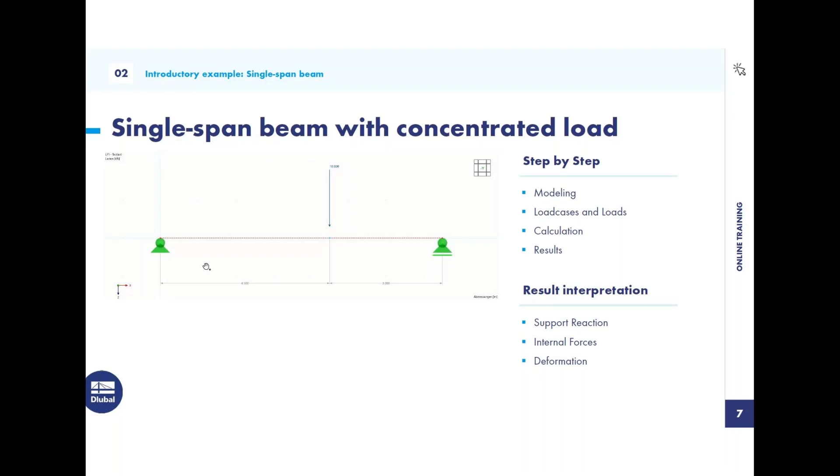Okay, so maybe then let's switch to RFEM. Yeah, okay, back to the user interface.

So for example, when we want to create nodes, that's the beginning of every modeling. Nodes are the beginning, and on these nodes you can put lines or members, and surfaces need these lines at the border.

So for example, with nodes, you can start here in the navigator data and click for a new node. I will show you. You can also use the menu, basic, nodes, or in the table you have an option with the coordinates to create nodes, or even here in the shortcut.

So you see you have different ways to model, but okay, then let's start. I will close this, and then let's start with a new model.

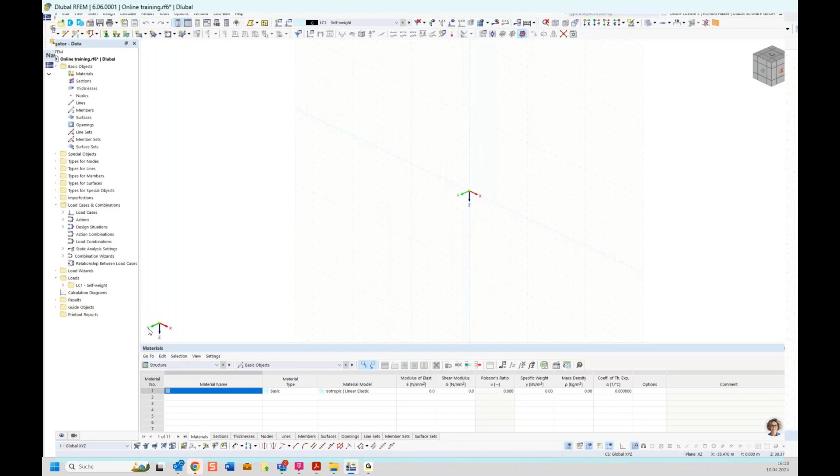It's connected to the global axis system. So you see the Y direction when I click on Y, or when I go to X. Same idea with views in X, Y, Z, or you can choose other directions. Another option is when you press Control and the middle mouse button, you can also turn around here.

Okay, but let's start with the modeling. Our system, I said we have a 7.50 meter long single span. So let's begin with the nodes. I choose the shortcut and click to the 0,0 coordinate with its left.

Now we have the first little problem. When I go here, we see 4 meters, and when I go here, 5 meters. So we want it in the middle. Now we have different options.

First, I can click on this node, and in this case it fits perfectly because we start at the 0,0 coordinate. Then I could change the X coordinate to 450 and say OK. Now you see it's at 450 how we want it.

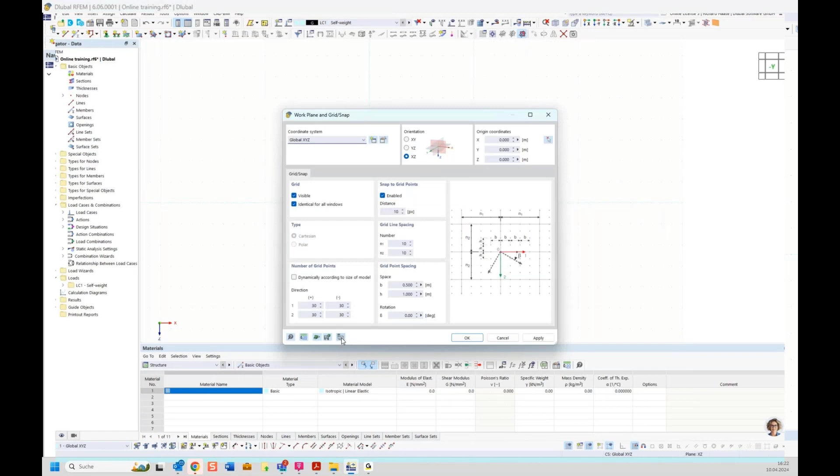Then we need the last point at coordinate 750. Let's do it this way. Maybe I'll set it to the default setting. You can also do it here. So now we have 3 nodes.

Maybe I showed this before: when you left click and go from left to right, you see orange color, and from right to left, you see blue. Maybe I'll continue first with a line. Let's go to the node, to this, and again to this.

When I go from left to right with this orange color, for example over this line on this node, you see only this node gets selected. But when I go from right to left, you see the line and the node are selected. So you have these both options.

The orange color only selects the object which is completely within this rectangle, and with blue you only need a little of the object and it's selected. So now we have 3 nodes and 2 lines. We can select these both lines, go with right click, lines, and edit.

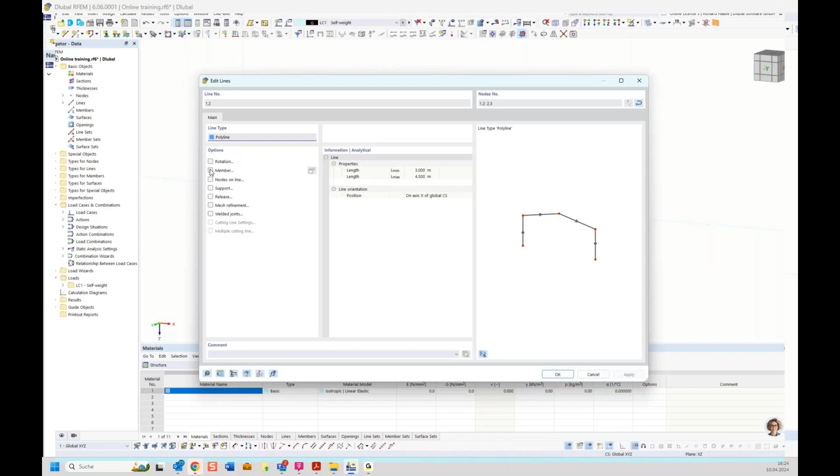So we have this line and want to transform this line or give it some properties, and we say we want to transform this line to members. Then a new menu opens, the new member menu. What can we see here? A member type.

The beam is, I'd say, the default type. The beam gives all forces to other objects. So for example when we go to tension, you can always orient yourself with these pictures. We see here all forces at beam, and for tension, you see only tension forces can transfer to other objects.

Same for compression, here it's only negative forces. But let's go to another member type: here is a definable stiffness. Maybe it's interesting for you in your study time. There you see we have a new tab here, definable stiffness, and we want to create a new stiffness type.

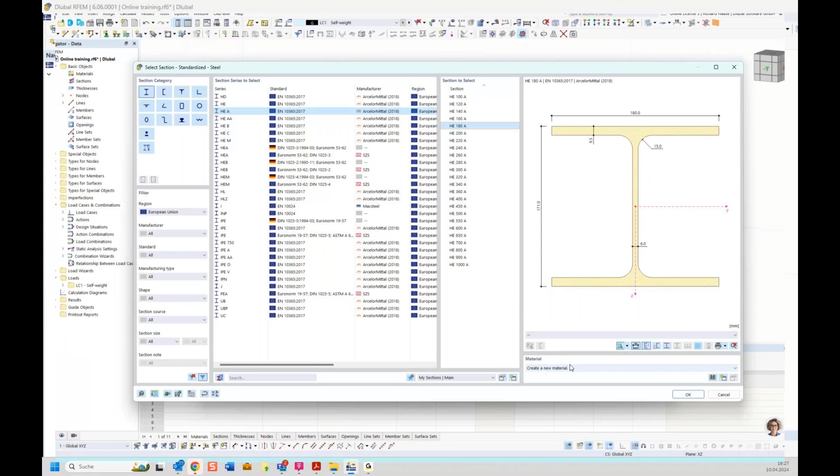When you create cross sections which are not tabled here, you can import them here. But let's take a standardized section, let's say such one, 180. Now you see this yellow color because we don't have a material created yet. So let's create one, there's again a library button.

Let's say European Union, material type steel. And then you see, oh my God, so much steel. How can I find my steel I'm searching for? You see here this searching function.

Let's take an S235, and the shown steel options are reduced. Here you can see, let's select such steel, say okay, and you see the yellow switch to blue. The blue stands in our program for steel, and we say okay.

Now we have an HEA 180 with the steel as S235. Say okay, and okay. Now we can see our property-less lines are transformed to such members.

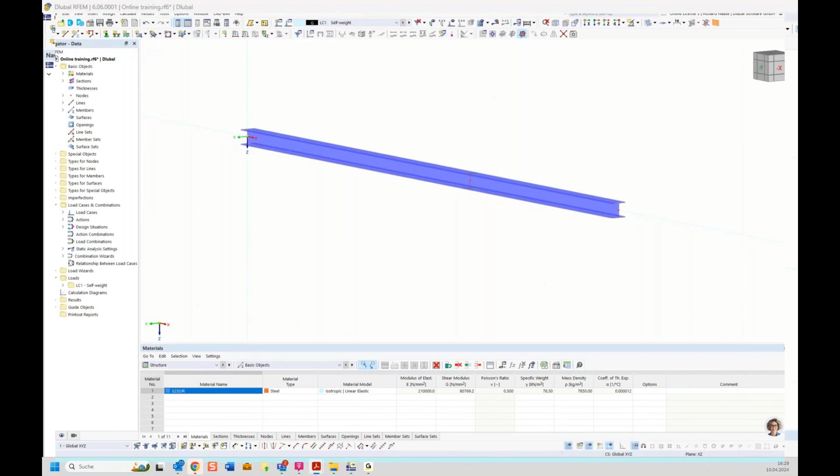So what we need are the supports we have here and the loads. But before modeling this, I will give our AI assistant the chance to calculate, and then we can compare the RFEM 6 results to the results of our AI assistant.

I copy from my document: a single beam with length of 7.50 meters with a single load at 4.50 meters of 10 kilonewton, and I want to know the bending moment at a length of 450. Then we start, and Mia will show us how good she is with her statistical knowledge.

So in parallel we can start modeling the nodal supports. There, when we go to this button, you see the degrees of freedom, the translational and the rotational.

We say okay, X direction and Z direction fixed. We want that on the left side. Say okay. And you see, when you click with the right mouse on this button, you can increase the size.

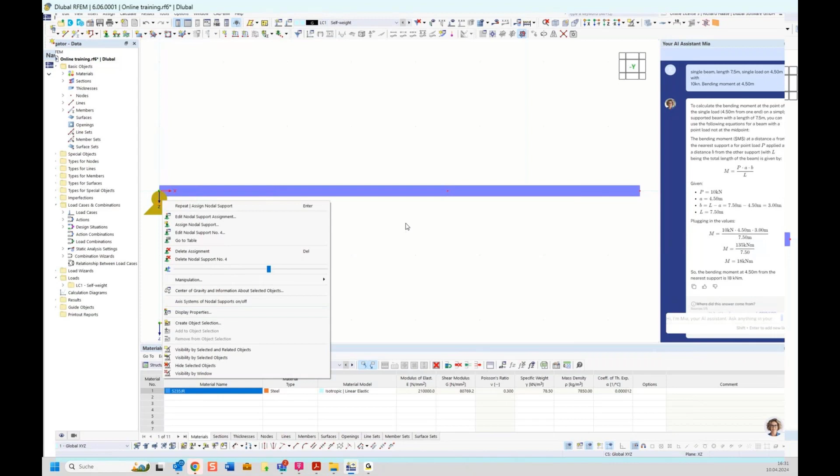And we need another one. We need here a nodal support with roller properties, and we say take our point. Okay.

What is missing? Maybe to control the length again, you can click here for dimensions. Didn't I click on my first node? Oh, that was wrong, sorry.

Let's select on this node, and this node. Then we must see the plane, and we must choose here the second plane. That's fine. We see our length is 4.50 meters. We have our control, our 7.50 meter long single span.

Now we need our nodal load. We go to loads, nodal loads. But you already can do it here in the shortcut, new nodal load, or even through loads, nodal loads. So everywhere, also in the table, you have the option to model in different ways. Let's do it this way: a new nodal load on our load case self-weight.

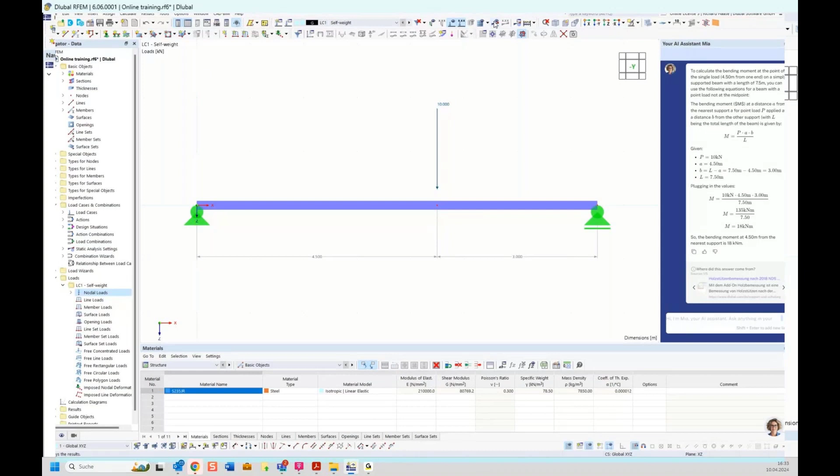On this button, you can start the calculation. For this load case, you also have the option here to calculate all, or when you have more than one load case or a lot of load combinations and other things, you can see here you can select what the program should calculate.

Global deformations, you see here the navigator results is new because we have calculated and have some results here. But we want to go to members, internal force, and to the bending moment My. Mia says we get 18 kilonewton meter, and our program said 20.4. So who's right?

I say Mia is right, but what's the reason for this difference? Maybe let's check the support reactions. So we have 10 kilonewton from the top side, and see here 5.3, 7.3. Okay, it's higher than 10. So something must be wrong, or not wrong, but how can I say.

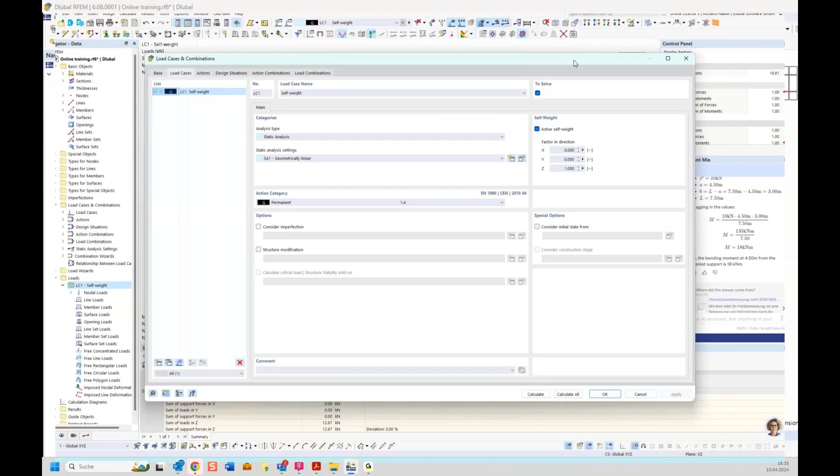We must investigate, and the reason is the load case self-weight. When we go to edit, here we have an active self-weight in that direction. So we have created our steel section, and this steel section gives its own self-weight on the structure. The default setting is that it's activated, but I'll show you how you can deactivate it.

We go to the navigator and here to the display. Then we have here the loads and the self-weight. And you see here the 0.356 is the self-weight of this HEA 180 profile. And that's the reason why the results are not as expected.

So let's deactivate here the active self-weight and calculate our self-weight load case again with our nodal load.

Now you see here our 18 kilonewton meter, exactly what Mia said.

Maybe Mia can assist you with statics questions, or even if you have questions about the program, you can write it here and Mia will give you answers.

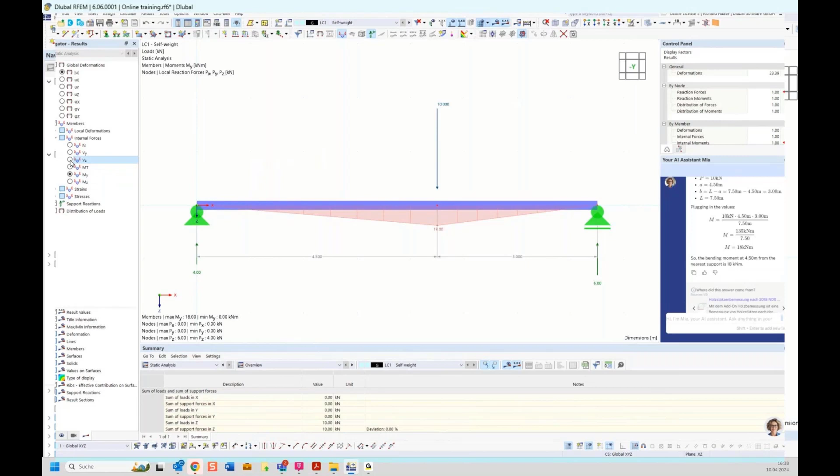Good, then we have this - the internal forces. On one side we see here the moment, but we also can see here the shear forces, the deformations, and the options for stress strains. You have a lot of options of the results to see them.

That's enough for my first example. Let's go to the next one: a two-span beam with alternating load positions. We will create more than one load case.

We will do three. Then I will show you the combination wizard from RFEM 6, when you have different action types like self-weight and snow, wind, and so on, and how we combine it with the gamma and psi factors.

Okay, and another thing, but let's start with the modeling of our second example. Okay Mia, thanks. Then I will delete my model.

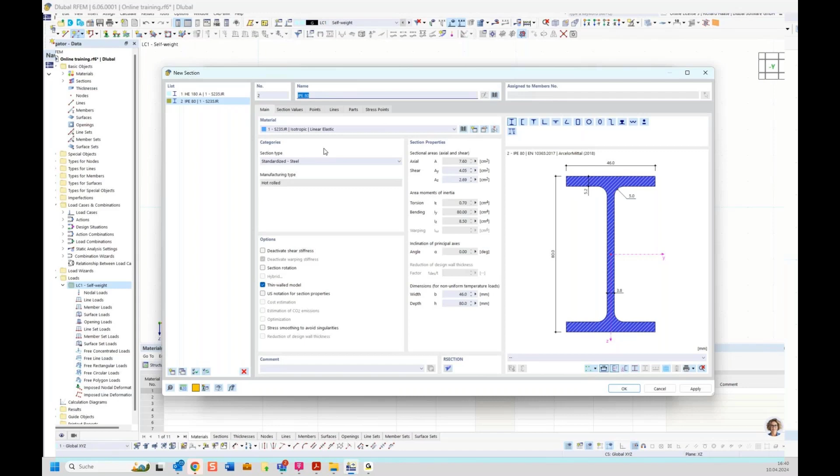We have a HEB 300, and now you see the fitting standard. Let's take this with the Euro norm, and we say OK.

From 0, we want to go to 10 meters. You see, it's a faster way than selecting the nodes and then the lines and transforming the lines. I wanted to show you the principle of RFEM 6, because behind this member are always nodes and lines, but this is the much faster way.

Now we have a single span, but we want a two-span beam. So we click with the right mouse on this member, divide member by distance, and now you have the option between percent and meter. 50%, 5 meters, that's exactly what we want. So we divide our member and now have two 5-meter beams.

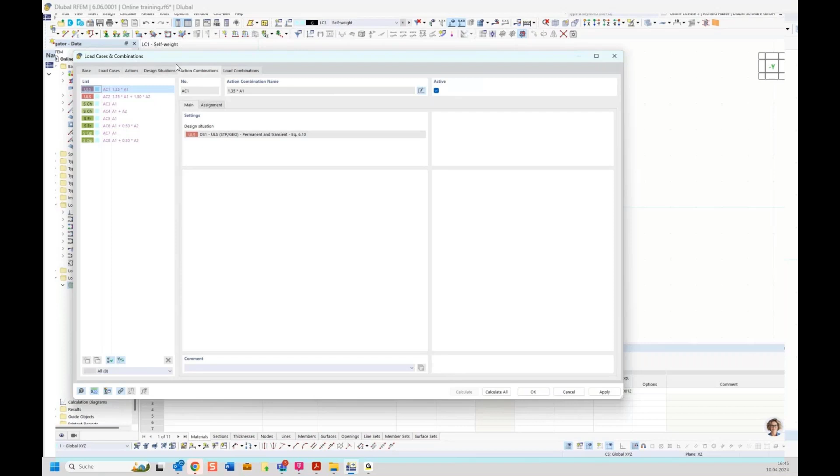Let's have a look at our ULS. Here you see Eurocode information, the combination rules with the gamma and psi factors. Now we see it combines the actions, the A1 and A2 of our self-weight and the other action, and here the load combinations.

Maybe here it's not so interesting, but I have another example where we have more than these two load cases. You can see here how it combines all load combinations after this rule.

Okay, now for our load case 1, we want to create a new member load. Right click, and have 2.5 on both members. You see, okay, he created it.

And for the left, the same new member load. On the left field, we want 5 kilonewton per meter, say on the left field. And now I could press the OK button, then close the load option here.

But I want to continue with my right field. So when I click here, apply and next, then I can easily switch to another load case. And okay, the same with 5 on the right field, and say okay. Now we are ready with our loads, and I close this with okay.

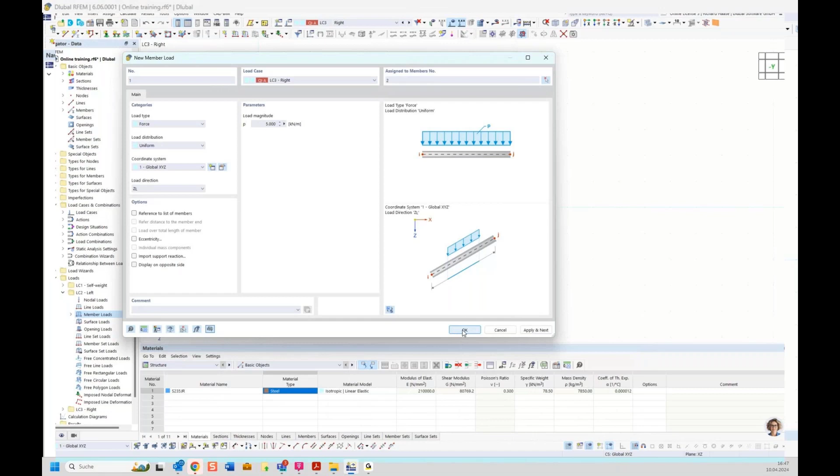Okay, and we can control it. We have the self-weight plus the self-weight of the HEB section, but I have deactivated it, though you can activate it again. Then our left field load, and on the right.

Maybe when you make controls with examples from literature, it could be possible that you get other results than in RFEM 6. The reason I show you, you can see it in the sections. You see here this option, deactivate shear stiffness. So the default setting is that RFEM 6 calculates with the axial and the shear stiffnesses, but in literature examples, most of the time they don't calculate with this kind of stiffness. So you can click it here, deactivate it, and make the shear stiffness infinity.

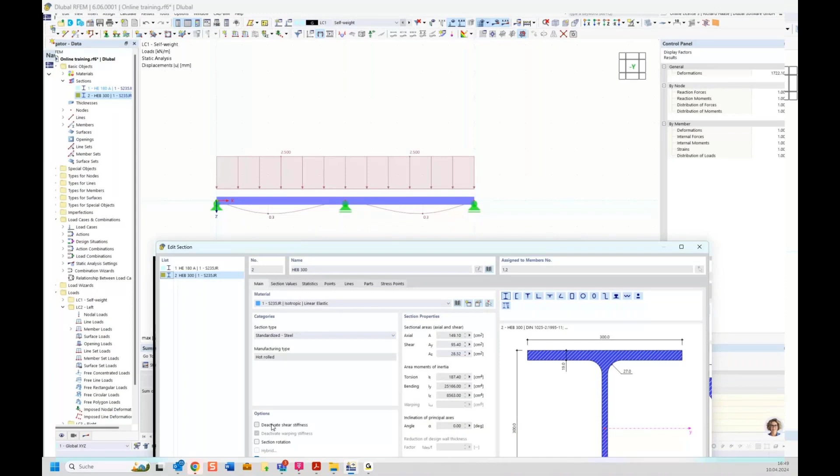Okay, so when we see the deformations, we have 0.3 millimeter here. And when I deactivate the shear stiffness, making it infinity, let's see - we have 0.3. Say OK. We get only 0.2. So the system gets more stiffness because the shear stiffness is now infinity.

So that's something you must know if you calculate with literature examples. Then deactivate it here, but I'll leave it active for our example. Okay, good. Then let's calculate all.

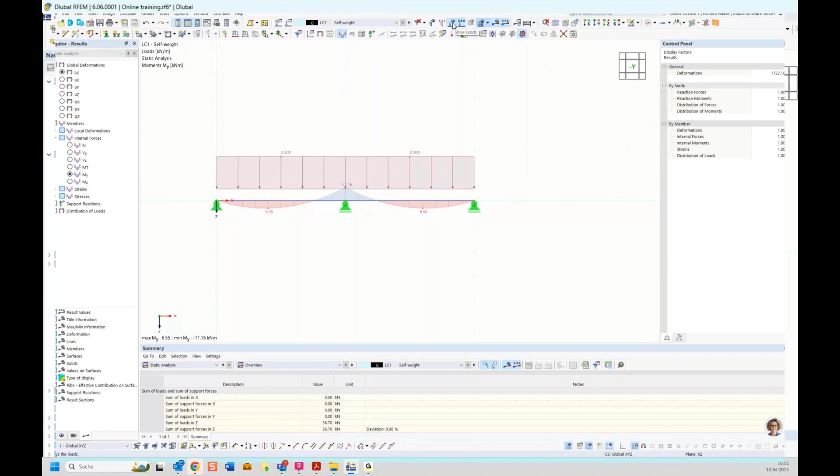And then I'll show you the results and explain something. Maybe we can choose the wireframe model here, it's then better visible. Let's see the bending moments. We can also deactivate our self-weights, our showing loads.

Okay, and we switch to our design situation. And now we see we have max and min values here. And why do we get this in this design situation? The reason is I'll show you how he creates this after the combination rules. Here for the ULS, you see he has 4 combinations in this case, and out of these 4, on every location, he shows you the min and max values.

Okay, so now we want to know where this result comes from. So this minus 37 - which combination gives us this result? Therefore you go here to static analysis, results by member, go to internal forces, and now we're at member 1.

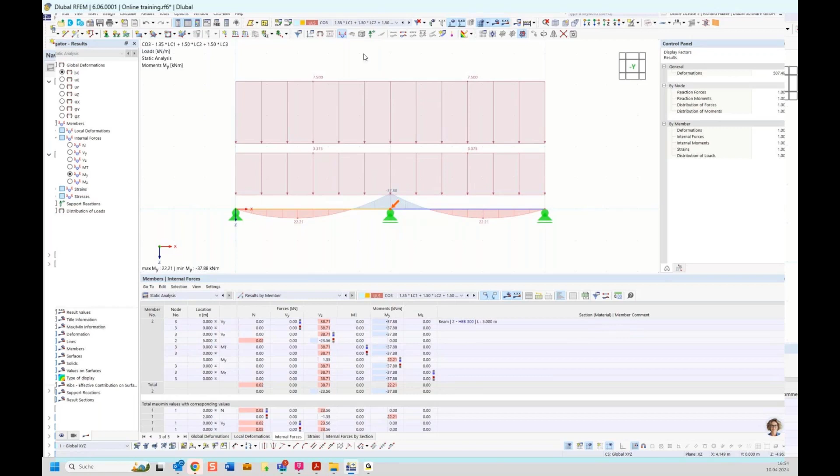Okay, then let's check it for the field bending moment. So this 26.78 - you say, okay, it comes from combination number 2. And combination number 2, you see here our self-weight with load case number 2, and load case number 2 was the load on the left field.

The same you can do for the support reactions. So maybe deactivate the member results, and let's see our support reactions. Now we want to know where this 77 kilonewton comes from. Same principle - results by member, you must switch to results by node, because this is a support node. Results by node, switch here to support forces.

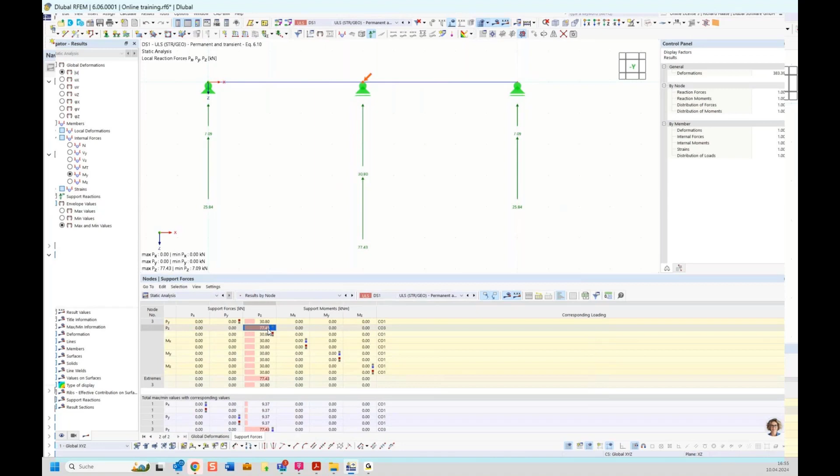And now, okay, see here, that's number 1, and we want to go to number 3. And you can see here number 3, and here we have the 77, which also comes from combination number 3. Combination number 3 was, as you see here, self-weight, left and right field load cases. So that fits well. Yeah, that was the second example.

Then let's switch to the PowerPoint presentation.

The next example is a Gerber beam or hinged beam. This system is maybe the same as our 2-span beam, only here there's a hinge, and through the hinge this 2-span beam becomes statically determined. So it's a coupled system of a single span to a single span with a cantilever.

Now, how do we want to create such a Gerber beam? In Germany, we have a book with a lot of tables and formulas, and we see here a Gerber beam with 2 times the same length, and a formula for the location of the hinge.

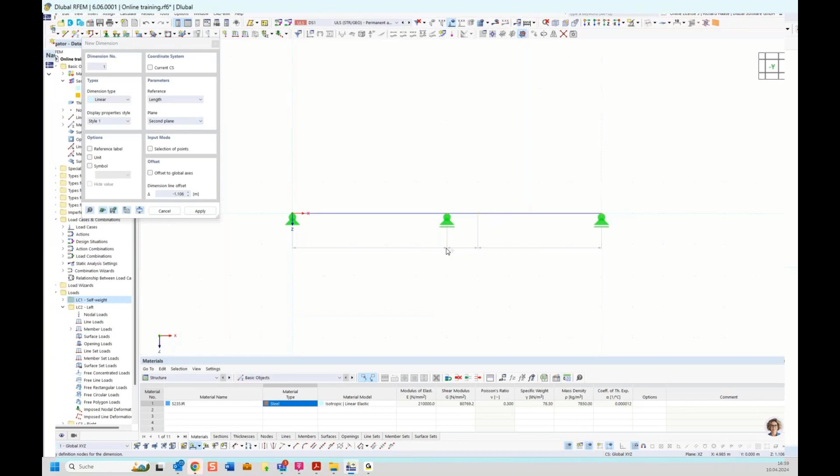Another point for this Gerber beam is that the maximum field bending moment is exactly the same as the moment over the support. And it's for the design check more easy when you have one size to choose for the section.

Okay. Oh sorry, I opened the German one. I'll switch back to English, sorry. One little moment, please. Okay, now it's open. I think you didn't save it. Okay, then let's close and make new.

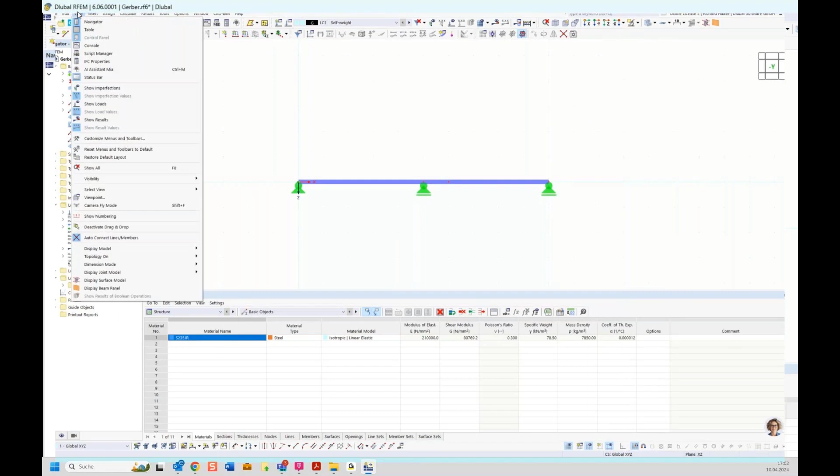And our nodal supports. And say here our roller, this one. Okay, a little bigger. Okay. So first, wait, okay, I will customize. Oh, wrong. Restore and set toolbars to default.

Okay, so now I show you how you parameterize your model. The command is here under Edit Global Parameters, so it's a little bit hidden. As I mentioned at the beginning, we have a search function here, so you can type global parameters and find it there.

Or, when working more often with this command, you can customize your toolbar. You go to View, Customize, Menus and Toolbars, and go here for global parameters. Every command you can find here or over this searching function. I want to add Global Parameters to my toolbar, so left click, hold, and add it here, and now we have it fast to find.

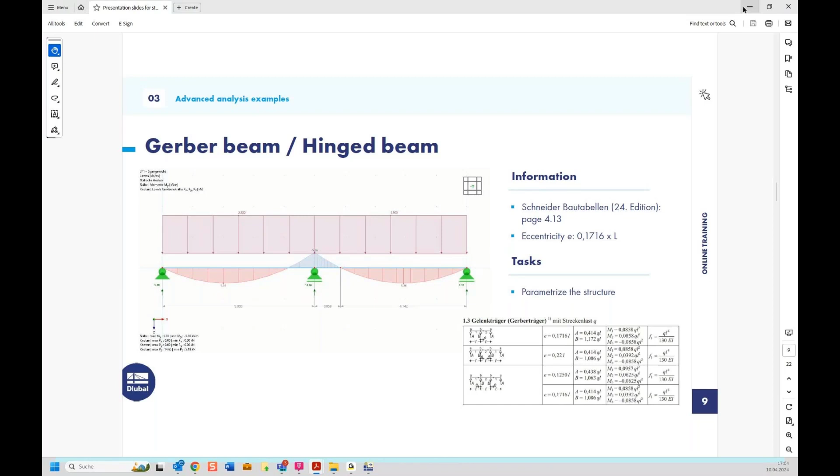And because of this formula, we can add this formula too. We can switch between value and formula. Let's choose formula here, and you see now our formula field here is available. So it's important, when you choose such formulas, you must use a dot instead of a comma, otherwise Rfem 6 gets problems to understand. So from our table book, it was 0.1716.

The field length, but this is only, it would be here, but we want to have our Gerber hinge here, so we must say another field length. And now we see, okay, it's at 5 meter 858. Now, we have our global parameters, and now we must connect our model with these parameters.

So we go to, oh wait, before I forget, our dimensions. Okay, so good, maybe I save it - it's a good thing all the time.

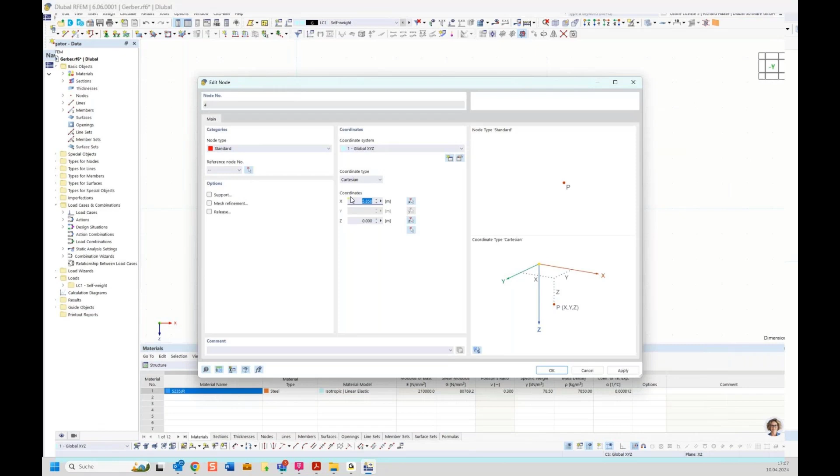Say again, global parameter. We want to have our Gerber, and you see our 5 meter field again with the yellow symbol. Okay, and you see before it was on 1 meter, and you see it switched the length.

The last thing which is missing is our hinge. So let's go to the member, same principle. We want a hinge. Important here, you see this direction: this is the start, and this is the end of the member. So we need a hinge at the start point. We click hinge, get a new tab, and we want a member hinge at the start, a rotational hinge, is that what we want? Say okay, and here we see our hinge. It's always the biggest size, but you can decrease or increase the size here.

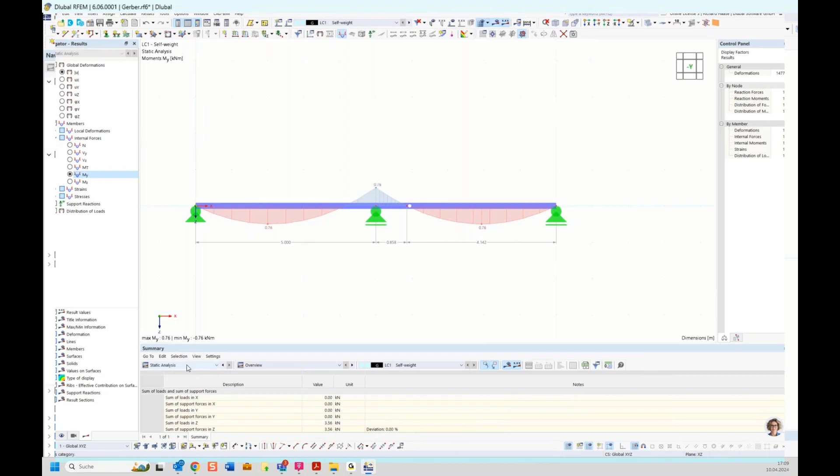So then let's view the self-weight load case to see if it functions. And global deformation we don't want to see. We want to see members, internal forces, and bending moment My. We see here the same results in a field and over the support. Now we want to check if the parameterization functions.

So when I say okay, I don't want 5, I want 7 meter field length. It's a little bit big, so say okay. You see 7 meter and 7 meter, and the hinge also moves. So then let's prove it. Yeah, and you see, okay, a little difference, but 1.50, so we can say it's right. And yeah, so you have now a parameterized Gerber system.

This parameterization you can use for all models you can imagine. And if you have such systems more than one time, that's really good and saves a lot of time. Okay, that was this example. And now, at this time we only used the member type.

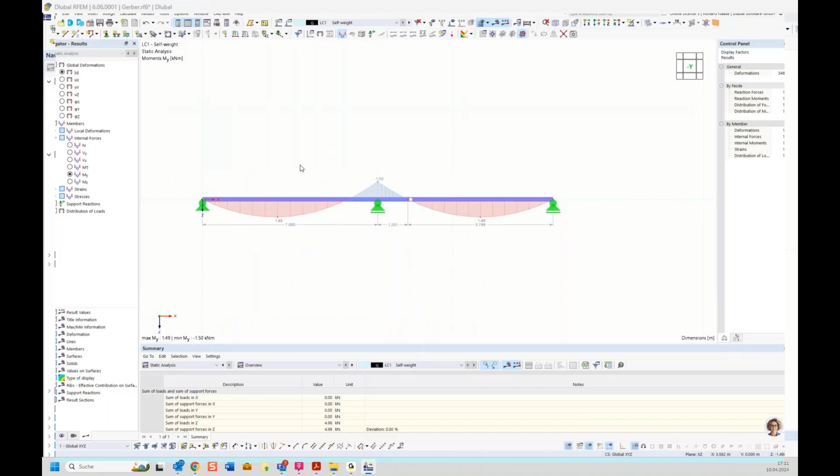Now I want to show you a frame with a tension member and show you the effect of such member types, and also the combination. You see here we want to model snow, wind, and temperature. Okay, then we can delete it here. Oh wait, sorry.

Okay, then let's create our frame. So we have again our HEB 300. Say okay. And 5 meter in the height, and 5 meter, 1, 2, 3.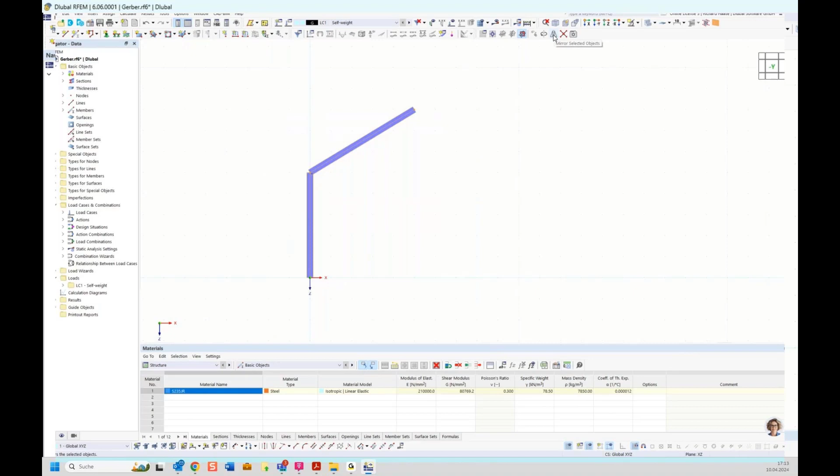And now, okay, our frame is symmetric. So you have the option to draw two other beams, but I will show you an option. Here it's fast, but when you have a big hall and it's all symmetric, you only need to model one half, and the other you can make here. You can mirror the objects, and now I will show you how it functions.

So you select your objects and say mirror selected objects, and you want to create a copy and choose the plane, as mirror plane the YZ. So you must change it here to YZ and change a point. Say here this top point, and say okay, and now you see you mirrored your system. For bigger systems, or symmetric and big systems, it saves a lot of time, and it's a very nice function.

Okay, then let's add our nodal supports here and here. And for the end, our tension beam, let's go again here, new single member and node beam.

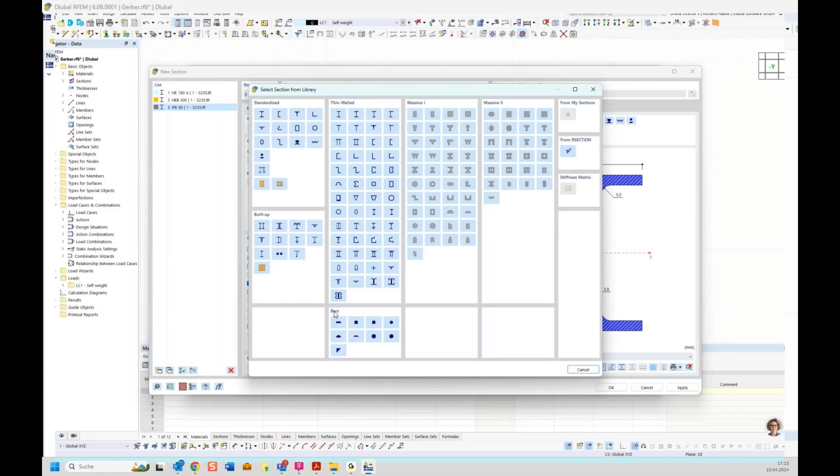Now we want our tension member only positive forces. Okay, and select him here. Oh, it's the wrong section type, but let's change it fast. We go to the library and want a bar type, a round bar with 30 millimeter. Say okay. It looks better, good.

Then I want to show you first the loads. Let's make a new load case. We have here snow we want to have, and another wind, and you must choose a fitting action category, and another one temperature, with action category temperature.

Okay, so now we go to actions. You see, now we have here on these symbols also the fitting action category, and now it's interesting, and also saves a lot of time, this automatic load combinations with the combination wizard. Okay, that's only the self weight, but look here, we have self weight, snow, and wind with a leading action category, and the non-leading get the psi factors.

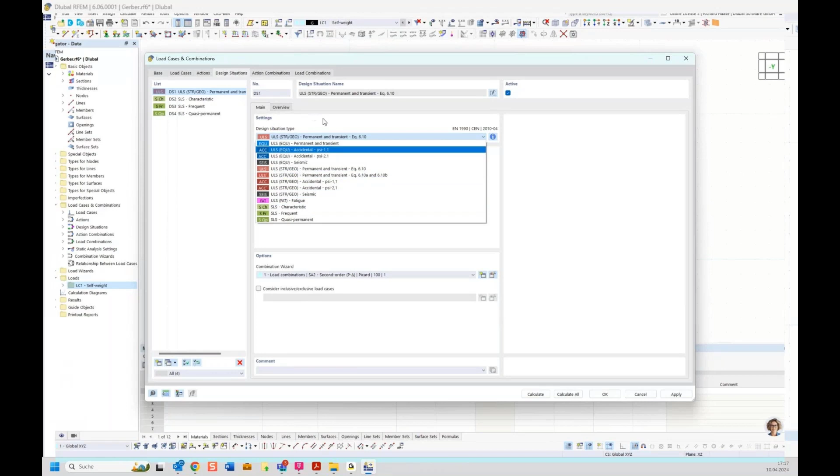So here, and this is very, very good. And you have more for fatigue or for seismic, so different rules, and with the help of the wizard you don't need to make it manual. It's fast, and you're on the safe side, and have all combinations, all possible combinations.

Okay, then let's say okay. I think it's really the problem of the new GoToWebinar. Sorry for that. That's not the standard faults.

I will start RFEM new.

Okay, restore. I hope he saved it. Then let's fix modeling it again. Wait, maybe I have it here. Gerber, maybe. Okay, then I have some right materials. So we had here our 5 meters. Okay.

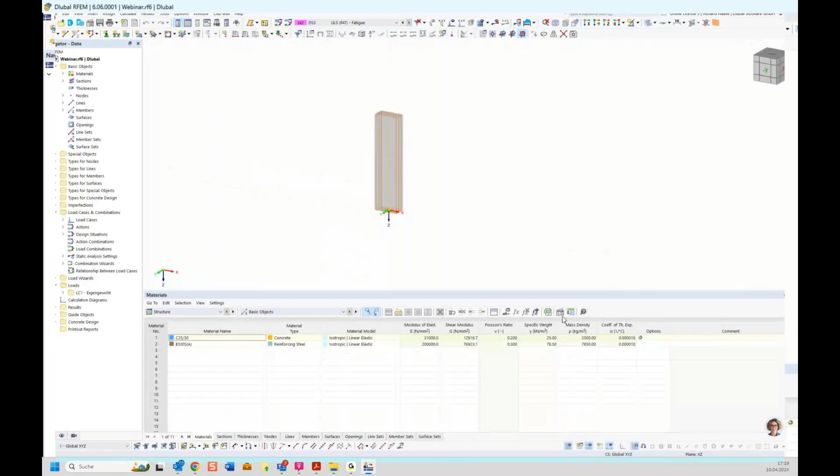I started new, must depend on this new GoToWebinar. Normally it don't crash. Cannot be moved. Okay. Then I will try it again, and it's away again. Okay, one more time.

Otherwise, we can maybe go into the coffee break, and I can try to either model it afterwards, or we leave this example. Oh, okay, maybe that's a better idea. Yeah, okay, maybe my PC has some problems with the new GoToWebinar. Then let's do it this way. Let's go into the coffee break.

Jonas, what do you say? Maybe 10 minutes? Let's make a coffee break until 5:30, and then in 10 minutes we meet again and go further and explore some new realms in Rfem. Okay, all right, yeah. Okay, then have a good break. See you guys.

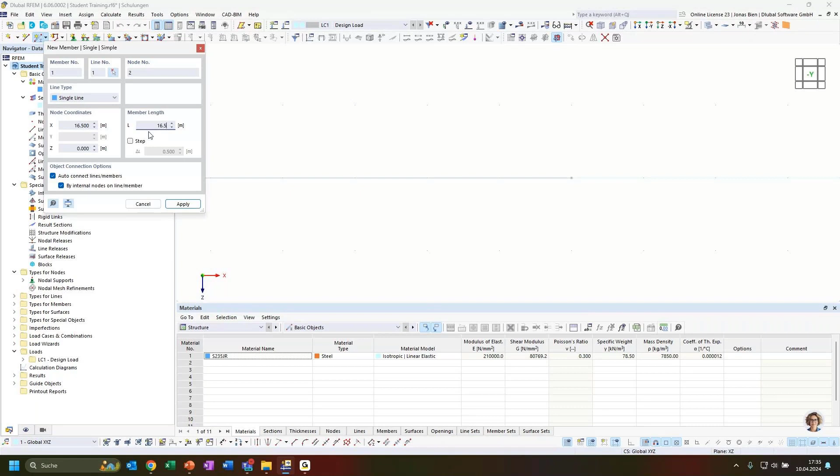All right, so first of all we model the single span beam. We create a new member with a member type beam. The section would be HEB 300. Click OK. The length should be 16 meter 50. So I don't have a point to grab here, so it's actually hard to find the correct length. Therefore I would just use this input dialog to set the length to exactly 16 meter 50.

The important part, if you use that, is that you don't go back into the graphical user interface. If I type something here and then go back to the main window of Rfem, it will directly overwrite my input value. So I need to make sure that when I input this value, I hit enter or apply before I leave this window with my mouse cursor. Alternatively, one other solution would be to adjust the grid or manually change the coordinate of the second node. There are multiple ways to define this beam of this exact length.

Then we had two additional nodes on this member where we want to connect the vertical truss members. So I divide this member by two intermediate nodes, and I set the option to create nodes on member, because I don't have to divide this member this way.

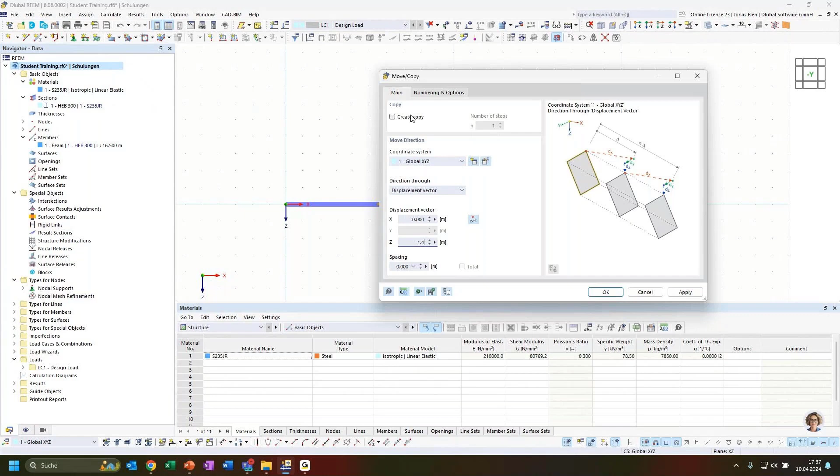So in order to achieve this position of the truss end nodes, I can use my copy function. I think the best option would be to take the nodes on member, the intermediate nodes, select them, go to the copy function, and copy these nodes in Z direction by -1.4 meters, making sure I want to create a copy. Because these nodes were originally nodes on member, when I copy them away from this object, they are directly transferred into node of the type standard. Now I could define my truss members between the two nodes.

What I could also do, I want to show you an alternative option. Here it doesn't make so much sense, but in larger structures, that's a very nice feature you can leverage to speed up a modeling process.

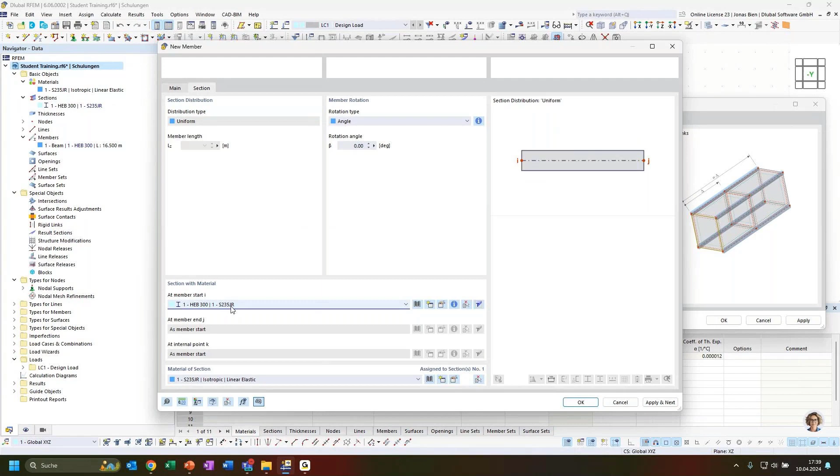I could either give a template member from my structure, or define a new template, and that I want to do because this definition of this member should differ from the first beam I defined. So I want now to have a truss member, and the section shouldn't be HEB 300, but an IPE 200 beam. I create a new section via the quick search up here, and create a new section number 2 of the type IPE 200.

One thing to add - Richard already told you that on the right side here you see which degrees of freedom these member types have, and there's a very nice indication of what internal forces are transferred at the end nodes. If you are unsure, I want to add that you can always use our online help manual.

In all of the dialogues you find this little box in the lower left corner, which you can click, and it will open our online manual - not only the correct manual for the program you are using, but also the correct section with respect to where you are opening it from. So I would directly come to the edit member dialog, and I could quickly browse through the different member types and get additional information. That's a very nice way to get first help.

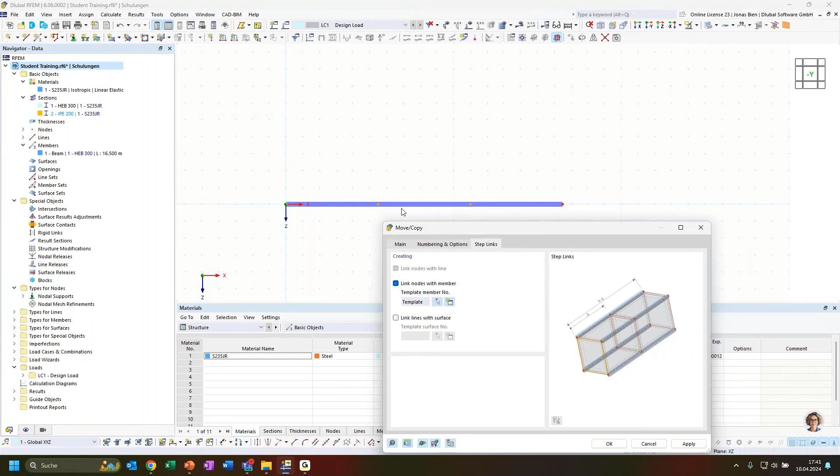All right, so the truss member is like a beam that has moment releases at its ends, and I will use this member type for the secondary support structure. Now I have finished the definition of the beams that I want to create with this move copy command, and I click OK. Now you can see with the copy command for these nodes, I have directly two additional members, and I don't need to do anything with this. That's already quite nice.

Then in the second step, I would take the outer nodes at the beam start and beam end and copy them minus 2.3 meters in that direction.

I could also, like if I have the dimensions here in this PowerPoint presentation, 1 meter 40 plus 0.9 meters - of course I can calculate this in my head, but if I don't want to, or if the numbers are not that even or easy to sum, I can type the mathematical operation in this input dialog, and it will calculate the correct value for me.

What is also nice, I can enter values with units. So if I type in 2,300 millimeters, it will automatically convert it to the unit that I use for this particular input. So this is very smart.

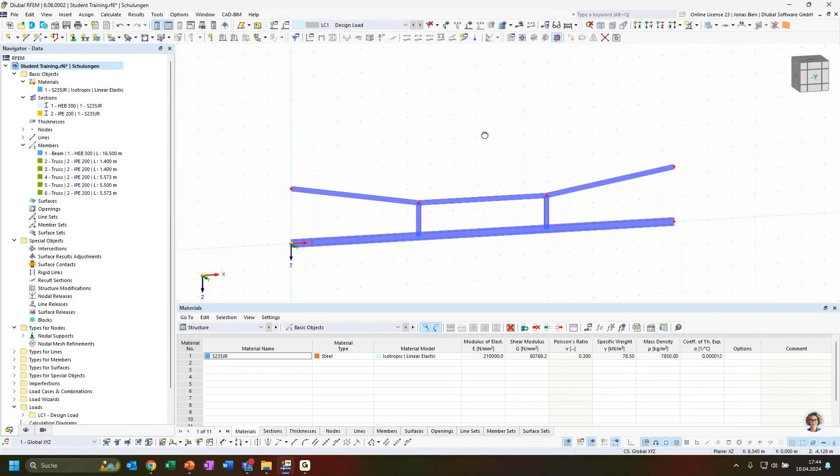So now I have defined all the members, and I can already see that they have different cross sections when I activate the rendered view. Up here you can toggle between different display modes for members - a transparent rendered mode, the wireframe model, and the solid rendered mode.

But sometimes it's hard to see if there really are different sections - they could have the same height but different section dimensions or whatever. In that context, I want to show you another function that allows you to easily distinguish between different sections or beam types. You can go to the Display Navigator tab, the second in our navigator.

Under colors of rendered objects, you can color the beams, the members, by their properties - for example, by member type. If I activate that, I see that this lower member is now colored in blue, which stands for beam member type, and the rest of the structure is colored in green, which stands for truss member type.

And I can also do that for section, for example, to highlight that I have different sections in my model. On the right side in the control panel, I automatically get the corresponding legend to the current setting. So this is quite nice to get a better overview of the elements and objects that you have defined in your model.

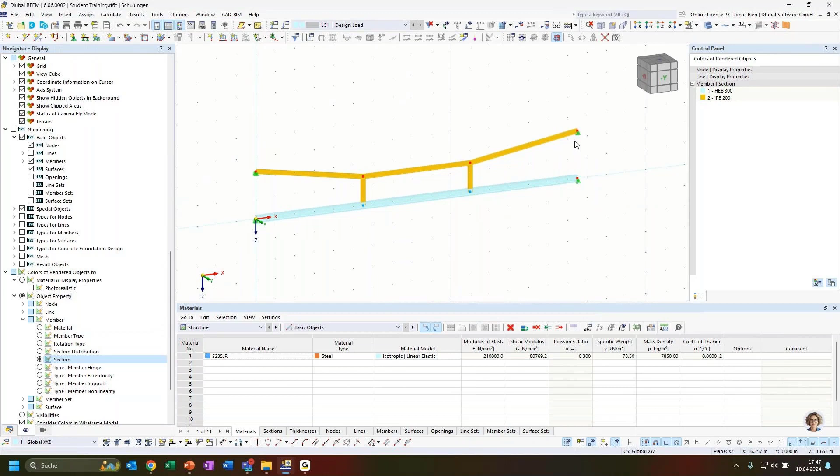If I would apply the same boundary conditions to the upper support structure, it wouldn't make a lot of sense, because here I need this horizontal restraint to actually make the upper structure stiff.

I can imagine that when I now, in the last step, load my lower member, this beam member, with a vertical load of 15 kilonewton per meter. I just do that right now.

Then the secondary truss member structure above it acts like some or provides some elastic supports at the thirds of the member of the single span member, and of course the stiffness of the support depends on the stiffness of the nodal supports here at the ends, also on the truss member stiffnesses and the length and so on.

And if these wouldn't be fixed in the X direction, they would just move towards each other, and I wouldn't have any additional supports provided by this upper substructure here.

All right, so now everything is set for the analysis. I've defined my members, I've defined the load, I've defined the supports. So I can now run the simulation. I do that by asking for the results, but of course I don't have any results yet, so it automatically calculates.

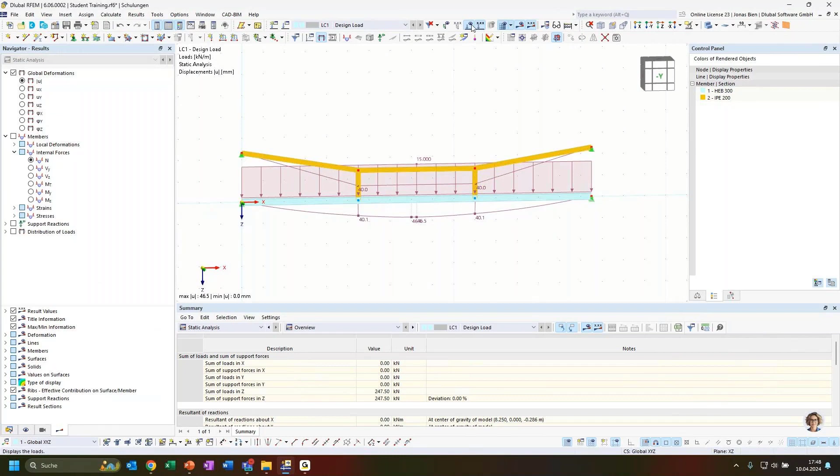And then I can access the results navigator and first look into my global deformations. I will switch off the loads just to make it a bit more informative or easy to see those deformations. And then I could also switch the display of these deformations, for example.

I mostly like to analyze member deformations by using this option to show the sections colored, because in this way I not only get the deformation of this wireframe model, but I can directly see the intensity of the deformation by the plotted color. Moreover, I could already see if there would be some torsion in the members by the display of this cross section. I could directly see this, whereas in the wireframe model, I can only see the overall deformation at a certain point along the member.

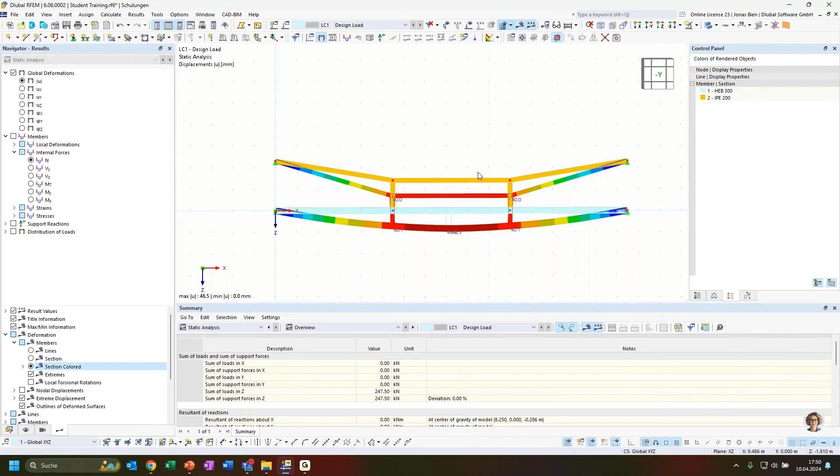So that's also useful. And what I see now is that I have around 45 millimeter maximum displacement at a midsection of the single span beam down here. And of course, the upper support structure is also deforming with it, elongating in these truss members, because all of them should be under tension.

We can check that if we proceed and go to the internal forces in our system to better read the forces. I go to the wireframe model and deactivate the rendering, and now I can see that I have very large tensile forces in this above supporting structure, and a vertical normal load of 40 kilonewtons in these vertical members, and these would be the support forces for the intermediate supports of this single span beam.

The beam itself is free of axial forces, because I released the horizontal support condition at the member end, but the single span beam below has vertical shear forces and also bending moments around the strong axis. And I can see by this jump in the shear forces that part of the shear forces are transferred to the upper substructure. But the exact values I couldn't read from this diagram because I only get the extreme values and the values at the end of each member.

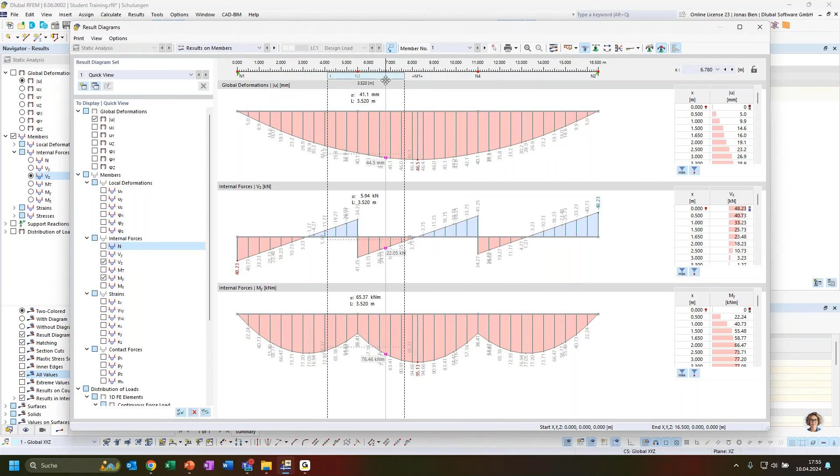Moreover, I have the possibility to average some results. I can just double click up here in this x-axis bar, and then I can create an averaging region, and it automatically calculates the average result value in this particular region. I can interactively move it over the length of my member to get the mean or average value within this window. This can also be helpful in some cases, like if you want average support reactions or something like this.

This also works for multiple beams. So if I select the 3 upper truss members here and open the result diagram option, it shows me the results for all these 3 members. It indicates on top here that the first section represents member number 4 from node 7 to node 5, then member number 5 from node 5 to node 6, and member number 6 finally. So that's also quite nice.

All right, that's what I wanted to show you in the context of this particular example.

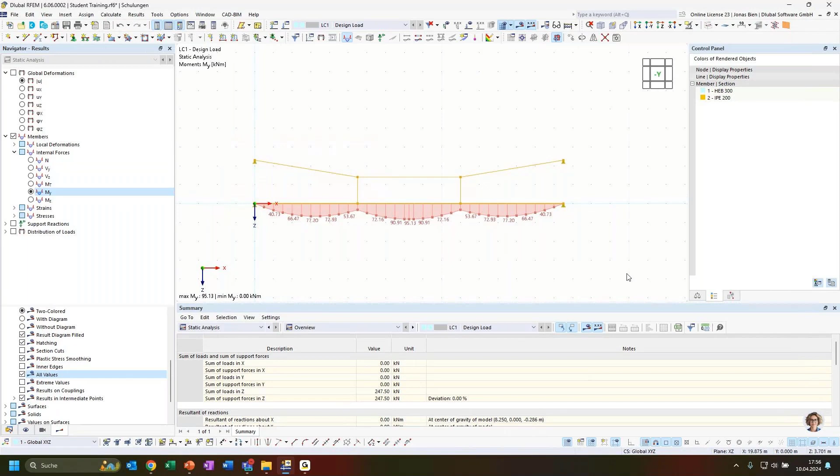If there are no open questions, I would proceed with the next one. I'll delete the complete structure and show what task is next on the list.

So the next exercise is to investigate a truss structure, and it says it should be an ideal truss structure. What does this actually mean?

It means that we have only axial forces in the members, and for this to be true, we need some implicit assumptions: that we have perfect hinges in the connection of our truss members, and that we have no imperfections of our members, so they are straight and have perfect geometry.

We don't have any eccentricity in the connection of the members, so in reality it is often the case that the system lines of the members, for example in this node between the upper chord and the diagonals, are not in line. Often it is not possible otherwise.

Then we only have applied loads on the nodes between members, so we don't have any intermediate loads or uniform member loads. Even the self weight of the members is neglected.

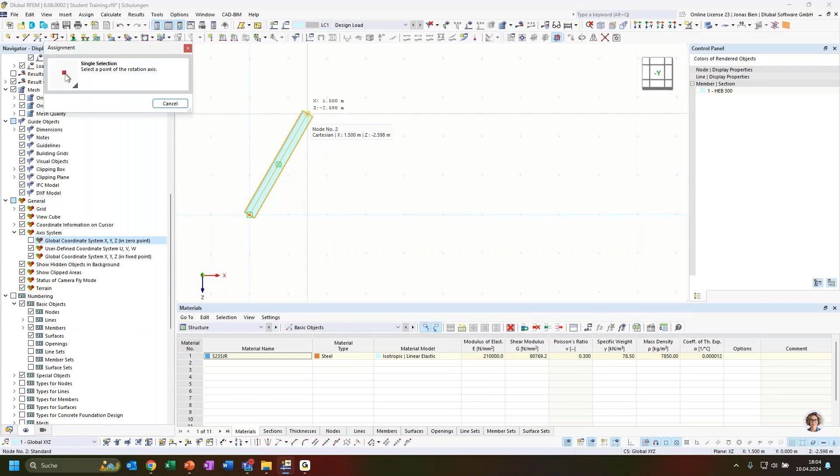The y-axis is pointing out of the working plane, but the origin of this rotation should be my member end, so the upper end of the first member that I have defined.

And if I now click on OK, I directly get 2 additional members that are rotated by 60 degrees respectively. So I can also measure this just to show you.

I can measure the angle between the 2 members, and you see it's rotated by exactly 60 degrees.

Okay, so that would be a good starting point. Of course, now I need to add this substructure or additional diagonals and upper chords to the model to finish my truss structure. And to do this, I can use the drag and drop function.

So I can just select all the members and nodes I have so far defined. Click next to the lower left node, because that would be the node that I want to connect when I copy this piece of the model, and then hold the Shift and Control button at the same time on my keyboard, and then with left click and going somewhere in my working window I can copy this substructure, and I can also snap to the existing node or some grid points to place this substructure another time at this location.

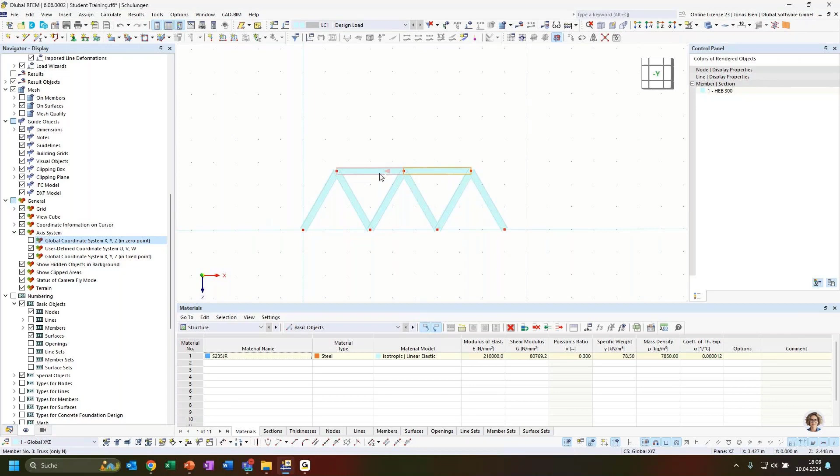I could also just choose these 2 diagonals, copy them the same way, and that would be a big step towards the finished truss. I can also copy the upper chord the same way, just selecting the upper 2 members, Shift and Control, left clicking, dragging it to another control node.

That's how you easily finish this truss structure by just copying with the drag and drop command some substructures or pieces of the complete structure. So that's very convenient and can be done with many objects, not only with nodes or members, but also with special objects. You can use this drag and drop function.

So that just leaves me with the missing vertical truss members that, so to say, divide my triangles by half. So I generate additional truss members, and I create them by selecting this upper node of my first triangle, and then I can snap to the midpoint of the first member of the lower chord. There is by default a snapping point that I can use to generate this truss member.

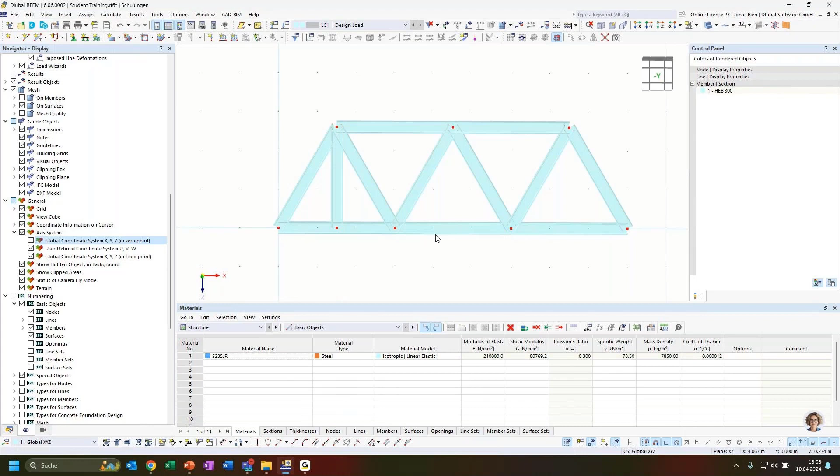And once I have defined the first one, I could again use drag and drop to copy them to the remaining places or locations where I need them. Or in this case, because I need to copy it 4 times, I can do it even quicker by just using the copy command, because here I can copy multiple times in one operation.

So I can create 4 copies and just need to define the displacement vector, so from where to where should it move and copy the existing or selected member or structure. I can define this displacement vector by just clicking 2 nodes, and now it will copy this member 4 times. The distance between the copies will be 1.50 meters in X direction. I hit apply, and with one operation, I get all the vertical members that were left.

Okay, then I need supports. I assign nodal supports to the end nodes of the lower chord. The left node again will be fixed in Z and X direction, and the second node will be a roller support.

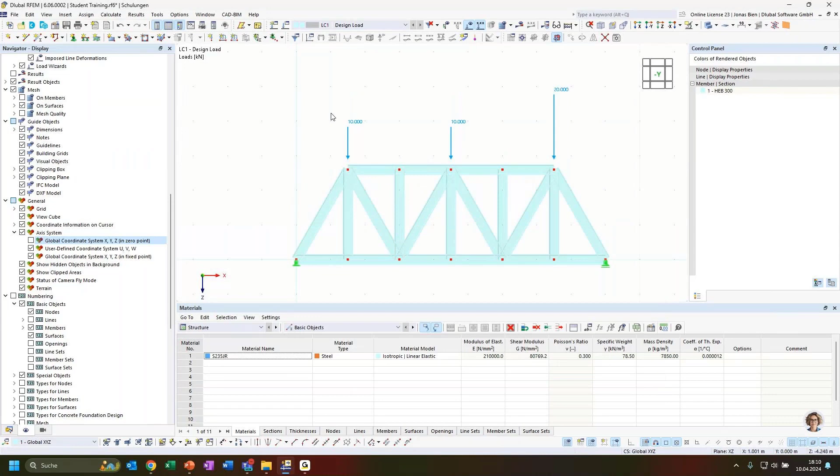So I have no restraints in my model. It's statically perfectly determined this way. And then I need loads. In the description of this task, it said we should apply 10 kilonewtons to the first and the second top node of the triangles, and a load of 20 kilonewton to the last node here, in Z direction, of course. And yeah, that would be basically it.

This is a bit hard to see. I can also switch to the default display properties. I can always go back to the default options if you modified something here but can't find a way to turn it back, you can just set everything back to the Dlubal standard. That would also help you in most cases to get a good default setting for your display. Just click here in the navigator and right-click it, and you get the option to reset to Dlubal standard.

Okay, now let's solve this model with the applied loading and try to solve the tasks that were asked. So again, we can check the global deformations, but nothing too crazy happens here. Everything that we see is expected, I would say.

But the interesting part is when we look at the internal forces, and explicitly we can maybe just make sure that we now have only axial forces in the system. We can go through them and we will find that we only have values for the internal axial forces, so for N, and these ones we want to investigate a bit more deeply. So the first task was to determine the support forces.

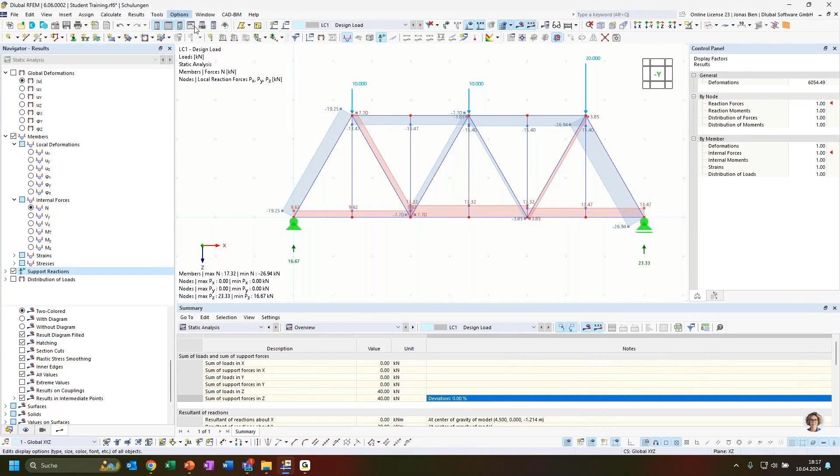But for the support reactions, we don't have this feature directly. If you want to go a bit deeper and change the size of those arrows, or change the color or the font, you can go to display options and display properties, and under results, support reactions, nodal supports, you would find settings to manipulate the size of these arrows. You could change the thickness, the color of the arrows or the text, the spacing between the arrows, and so on, and save that. You could also generate templates with these particular graphical settings and load them in your next projects, so you don't have to do this for every model over and over again.

All right, so then I would proceed with the next example, and that will also be a truss structure, but this time we don't want to model it by hand, but instead use the blocks feature to generate such a structure. I want to explain what a block is, where you can find it, what it can do for you, and how it can increase your modeling speed.

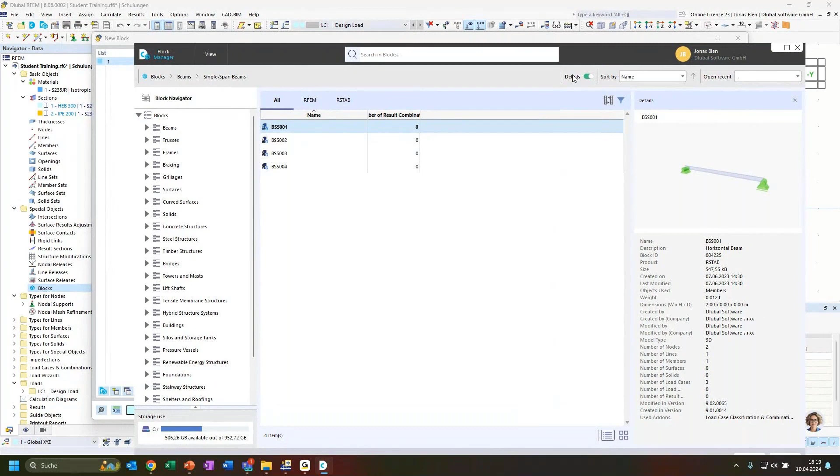Now we want to select a new block from the library. This is where you end up when you go to this block manager button. This huge library of predefined structures opens, sorted into various categories. For example, we have 2D trusses in this category, trusses 2D, and the first one in this list would be the one we should import into our model. But there are several ones with varying complexity, so you could also find the truss we just defined manually here in the blocks manager. The blocks manager is not limited to trusses though; we also have complete structures you can import, like bridges predefined that you can directly import and play around with.

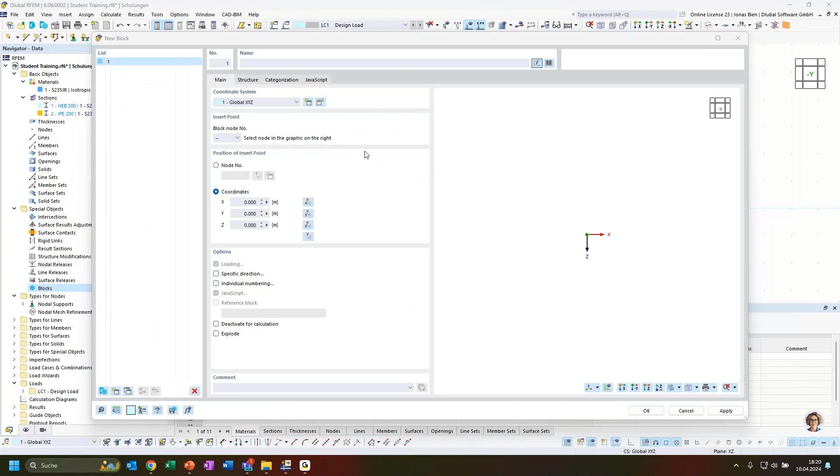The best part I want to show you about these blocks: when I select the truss type we want to choose, you can see I can say where I want to insert it in my model. But this block is also completely parameterized. Richard showed you before how you can use global parameters to parameterize dimensions of your model, but these are already parameterized. So before I generate this block, I can modify, for example, the number of bays, using 8 instead of 6, which would directly add 2 additional bays. I can alter the length of the outer bay and the inner bay.

Actually, they should be 3 meters, so I directly put in the correct values. The height should be 2.5 meters, and it directly modifies the block geometry in the preview. I go back to 6 bays that I want to use, and besides the geometry, I also have for this particular block options to define the sections of the top and bottom chord, diagonals, and verticals, which I will do as well.

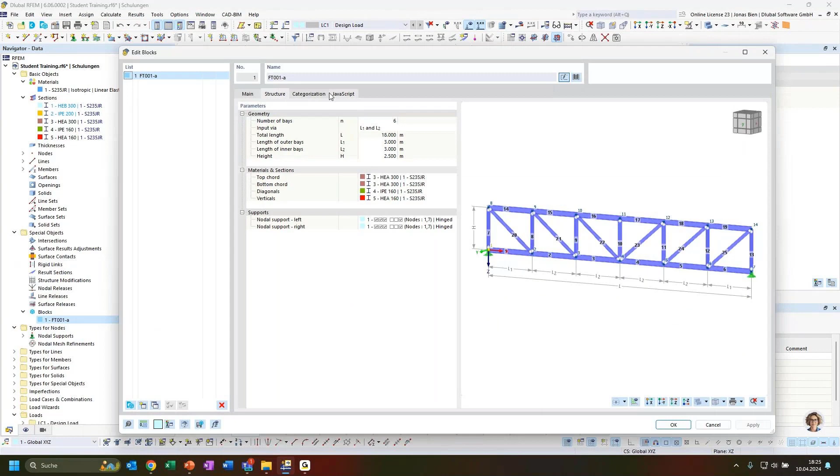What I also want to show you is what's behind these blocks. These blocks are generated by a script, written in JavaScript. This is the programming language which is used for our in-app scripting at the moment.

The good thing is, if you want, you can modify those scripts. They are locked by default, but you can unlock them and change them according to your preferences. You can also generate new blocks for yourself. So if you have structures that you use every time and want to fully parameterize, you can just create new blocks that you can use then every time in multiple projects again and again.

Of course, it needs some time to get used to this scripting environment and scripting language. But since we have so many examples in our block manager that have this JavaScript deployed, you can load these and copy them, and quite easily learn how to define them and extract pieces from different blocks to generate your own ones. That's a huge asset, I would say, for tasks that come back over and over again.

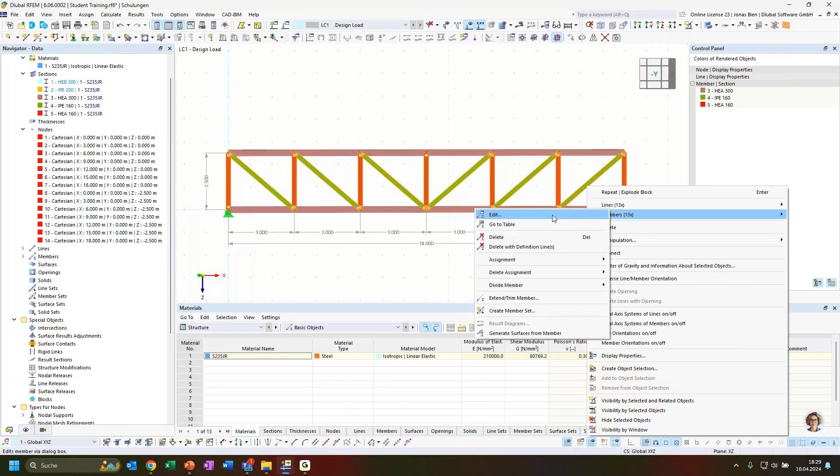One thing we should do with this model before we leave this example: in the block, these diagonals and posts were defined as beam members with hinges at the end to release the bending around the strong axis. But one task was to replace these beam type members with truss members. These truss members are also like beam members with internal hinges.

So when we use these truss members, we don't need to explicitly define member hinges at the end to release the bending moments. I can just select all the diagonals and posts, switch the member type from beam to truss member, and that would be it. So now we'd have the upper and lower chord as beam members, and the rest would be truss members. That should be it for this example. As I said, we don't want to calculate anything here, just to show you what we can do with our blocks.

That leads us to the two more advanced topics of this online training session. We want to now tackle a more theoretical topic, which is investigating the differences between first and second order theory.

And in order to do so, and also because time is running a bit, I would say that from now on you just observe what I am doing here and listen to my explanations. If you want to, after the training, model it yourself and try to achieve the results yourself, you can come back to the recording and do it step by step. Pause the recording if you need more time to model it or understand it. But since it's a bit more complex topic, I would say from now on you should focus on the explanations that I'm giving.

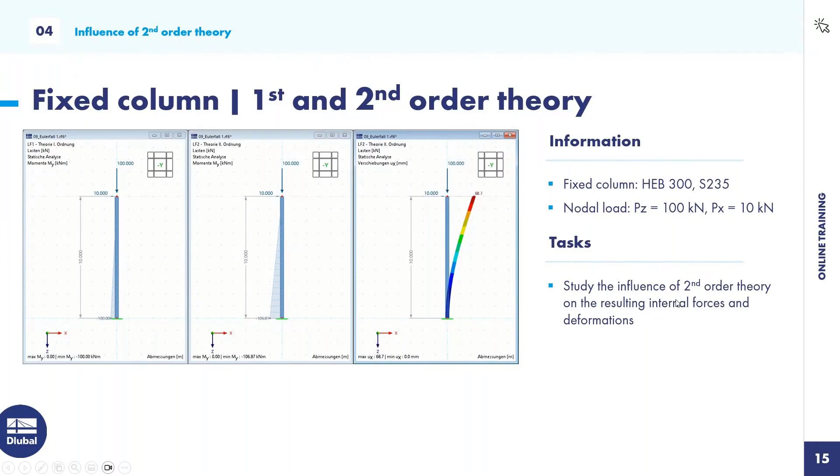As an example, we want to investigate a fixed column: a 10-meter column with a steel section HEB 300, with a vertical load of 100 kilonewton at the column end and a horizontal load of 10 kilonewtons also at the column end. We want to explore the differences between first order and second order theory in the first step. All right, so let's model this column.

This is again quite easy. We model a member type beam, section HEB 300 again, and we want to have a 10-meter long column. And it was also said we should fix it completely, so at the column end we have a fixed support. That means not only the translations are now constrained, but also the rotations at this point.

You can also see that now, since we have switched to the 3D model, we have actually 6 degrees of freedom that we need to take care of in our 3D model. That means 3 translational degrees of freedom, so movements in X, Y, and Z axis, and 3 rotational degrees of freedom, so rotations around the X, Y, and Z axis.

All right, then we need the load at the column end. That could be a nodal load, and we should apply loads in 2 different directions. So we could use 2 separate definitions for the nodal load, one for the load in Z direction and one for X direction, but we could also switch to the load type components, and here we can directly input each force parameter and moment value at the same time. So I just have to do one definition for our loading.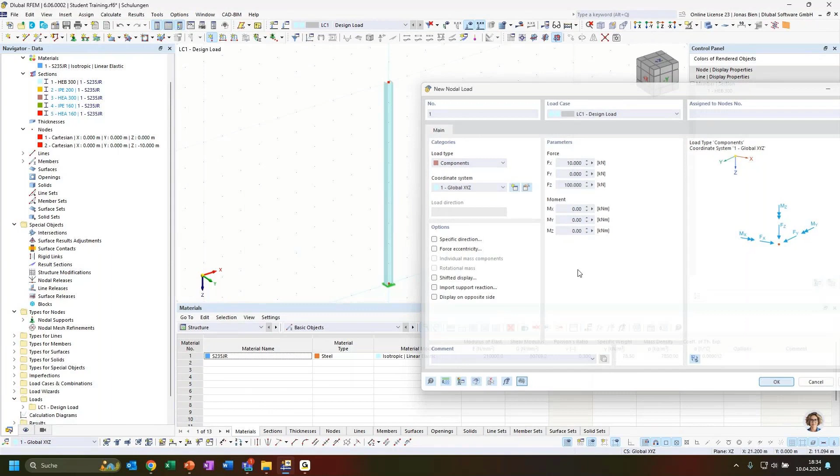I want to have a vertical load of 100 kilonewton and a horizontal load in X direction of 10 kilonewton. And when I assign that to the column end, we see that this load is now displayed at the column end.

Now, in the first step, let's see what the results would be using first order theory. So we just use the default settings for the solution that we used along this training session and check the results. It should be quite obvious, at least when it comes to the internal forces: of course we have an axial load of 100 kilonewtons in compression.

This does not change over the height of the member. Then we have a shear force in the strong axis of 10 kilonewtons because of this 10 kilonewton load at the column end in X direction, and this also generates a bending moment along the length. At the column base, this results in a bending moment of 100 kilonewton meter, which is the product of 10 kilonewton times the 10 meter height of the column. Of course that gives us 100 kilonewton meter. All right, so nothing too fancy.

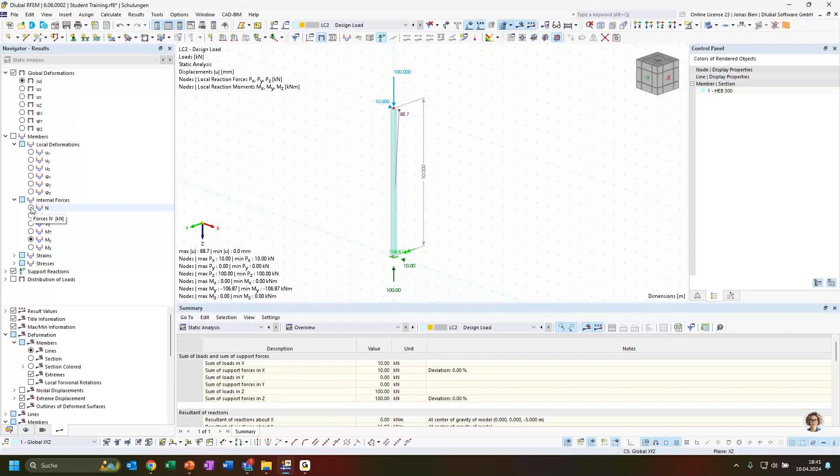The axial force is still almost 100 kilonewton constantly over the height, but there is a rather large difference in the shear force over the height and also in the bending moment.

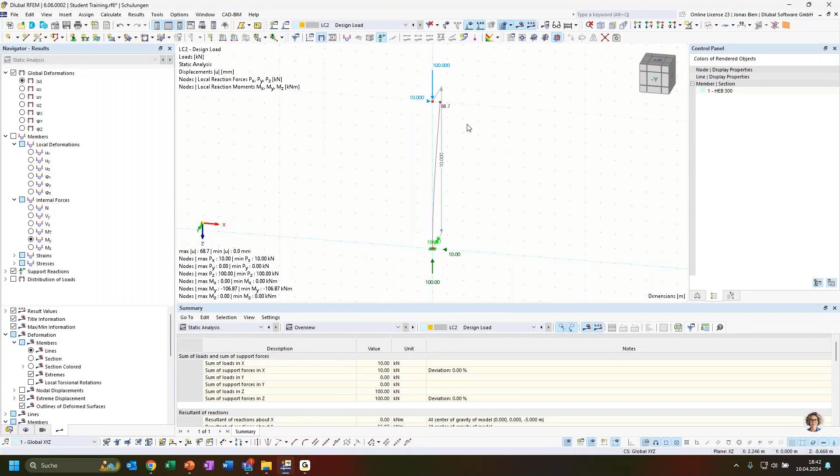So if we analyze the bending moment values, and maybe we can also set the wireframe model to see that - we can't really see that on the top node, but we see that at the rigid support we now have an increased bending moment, and that increase of 6.87 kilonewton meter directly corresponds to our vertical load of 100 kilonewton times the horizontal deflection of the column at its tip. So that would be 0.068 meter, giving us an additional bending moment of 6.8 kilonewton meter, which is what we get here as a result in our static analysis according to second order theory.

So we get an increase of the bending moment due to the deformation at the column end and the vertical load that is applied.

I also want to show you how you can compare the results a bit more easily. You could, of course, always switch between the load cases to show the different results, but you could also generate a new window for this model and split the view vertically to get this result twice. Then you can on one window switch to load case number 1, and on the second one analyze the results for load case number 2, which makes it more obvious if there are any differences in the results. You can then always activate one of the windows and adjust the result quantities to check and compare directly the results.

All right, but let's switch to one window and concentrate on the next information I will give you.

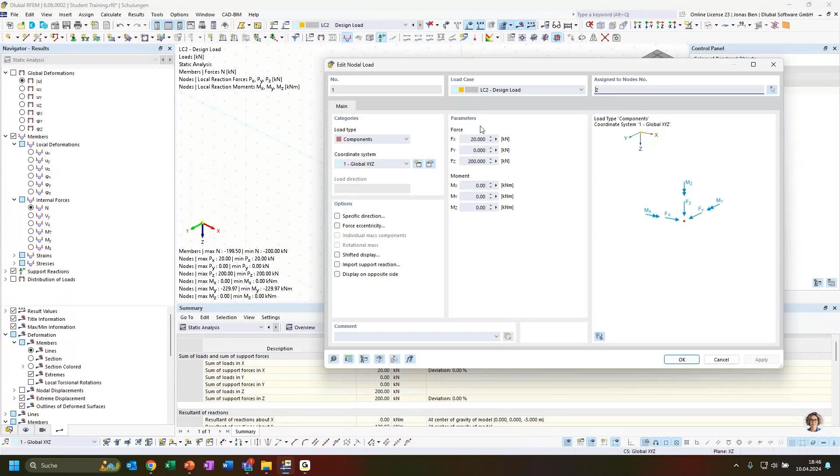And we could increase that to a point where it's not even possible anymore to find a converging solution, because our structure will get unstable. This means that due to the horizontal displacement and the very large vertical force in this case, our member wouldn't be able to withstand the bending moment anymore.

And this would then lead to an error when we try to calculate the system according to second order theory with such high forces. We would get a warning message that the structure is unstable and cannot be solved anymore. So we cannot find a convergent solution in this case.

And this is, of course, very critical to take into consideration or to keep in mind for slender structures that can occur. And of course, you could perform a second order theory and increase your loading until it fails to find this instability load, so to say, the critical load when the structure gets unstable.

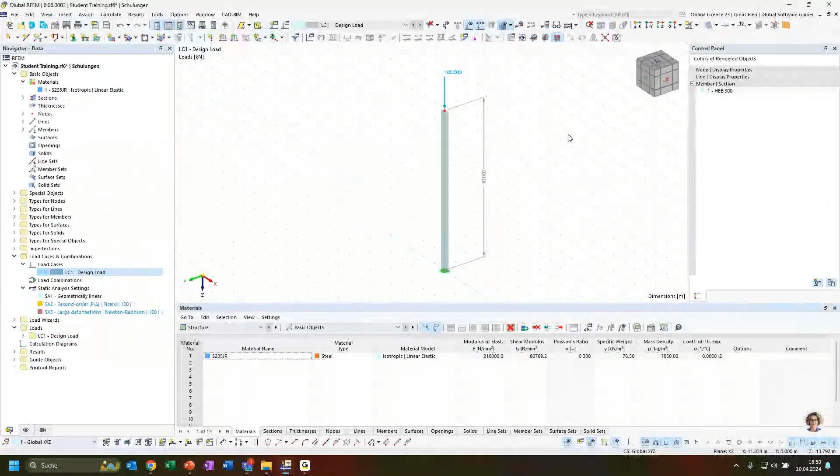But to have access to that, we need to activate an additional add-on, the first add-on that we get to know in this training series, and that's the analysis add-on structure stability. When I activate this add-on in the base settings of my model, I get the option to calculate the critical load for a specific load case or load combination that I defined.

So in this case, I'm back to my loading under first order theory, and I want to calculate the critical load of my structure under this load using a linear bifurcation analysis or eigenvalue analysis, and calculate the critical compressive force that leads to instability.

So I can activate this critical load calculation here in the load case or load combination tab. I have no load combination, but I could do it the same way there. And then again, as for the static analysis settings, we have two predefined stability analysis settings.

Again, as before, we can see what the options for the settings are, and can of course alter these settings. I can choose between linear eigenvalue analysis, which we want to do in this training, but there are also other options to take into consideration non-linearities of systems. So we could also use an incremental method, but that should not be subject of today's training session.

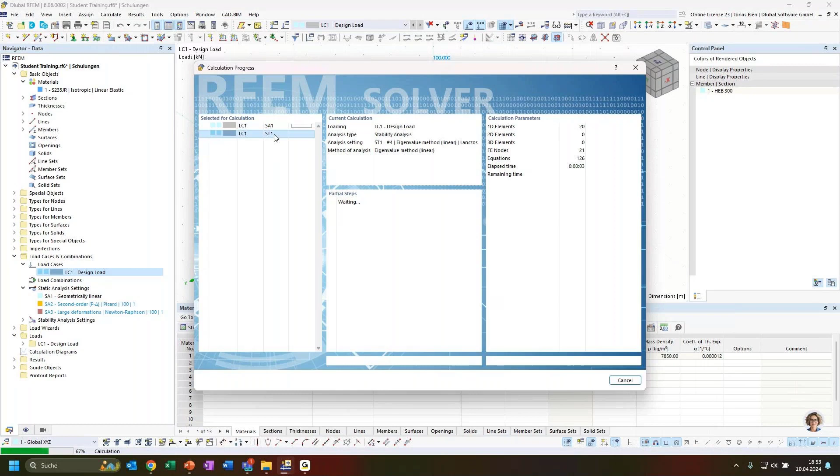And now you see that before the structural stability analysis is done, actually a static analysis is done, because the loading in the system must be known for the eigenvalue analysis.

And accordingly, we get for this load case now 2 different result options. We can choose between the results for the static analysis. That is what we have investigated so far, so we have investigated the deformations and the internal forces and so on. But we now also get the results for the stability analysis.

And this is interesting because it gives us the critical load factors. These are the factors that we can multiply the external loading with in order to get our instability load, or the critical instability load that leads to an unstable system.

And we also get them in this drop down here, and also in the table. Then we also get a magnification factor. This is basically a value that can sometimes be used to multiply or to determine forces according to second order theory by just multiplying first order theory internal forces by that factor.

In some codes, for example, in steel design, this is sometimes allowed, as a way to calculate second order theory bending moments without actually calculating according to second order theory. But this is not very commonly used.

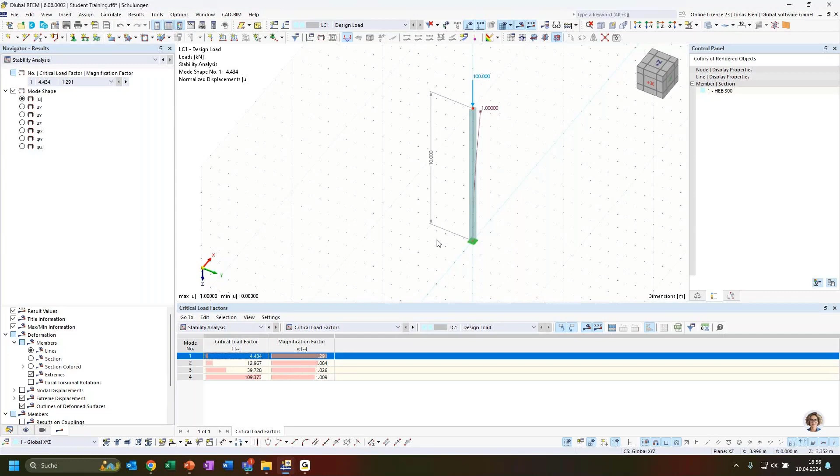And again, as in the static analysis, I can show the deformations on the section colored. And now I see directly that the first mode shape that I calculated corresponds to buckling of my cantilever column around the weak axis. The second mode shape has a higher critical load factor, so that mode shape would occur at a much higher vertical load, and it corresponds to buckling of this cantilever column around its strong axis.

And now I calculated the critical load factor, or the first critical load factor of 4.434, and that would actually mean that in a second order theory analysis, I could apply a vertical load to this column of 443.4 kilonewton.

So we can check that by just again copying this load case, performing a second order theory calculation, and adjusting the vertical load to 443 kilonewton. And this should still give us a stable solution. This should still work.

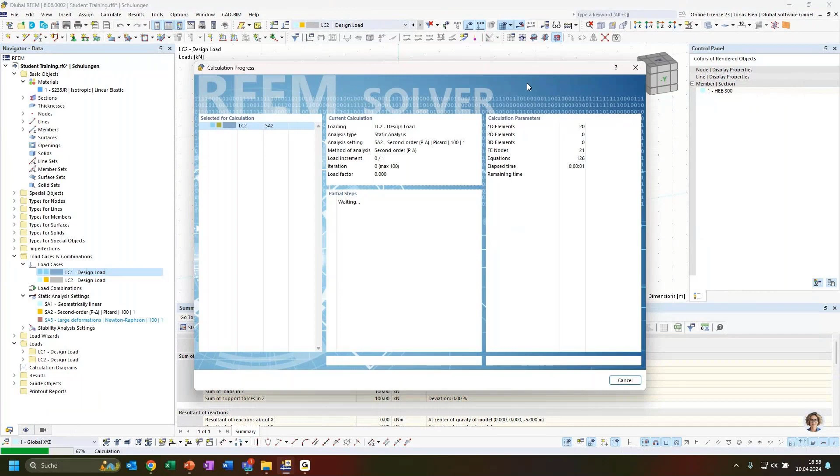Let's analyze again. I messed up the number, so it should be 444 kilonewton, which shouldn't work anymore. That's above the critical load we calculated with our structural stability add-on, and this should actually fail. Yeah, and it does. It now gives us the error message that the structure is becoming unstable, and we cannot find a solution when calculating this according to second order theory.

So this is a nice finding with our stability analysis add-on. We also get a third and a fourth eigen mode, which are higher buckling modes of the member. These aren't really interesting for us because, in the end, the critical load factor for a structure will most likely be the smallest one.

But the critical load factor, and also the eigen shape, are not the only interesting outputs of the analysis. We can also go to the results by member table, where we get effective length factors and effective length values that we can use for stability design of this steel column. If you've already performed a steel design or stability design for buckling of such columns, you have probably used the equivalent member method.

By using this equivalent member method, you need a critical buckling length as input. This critical buckling length is actually calculated for you for a particular system by our stability analysis add-on.

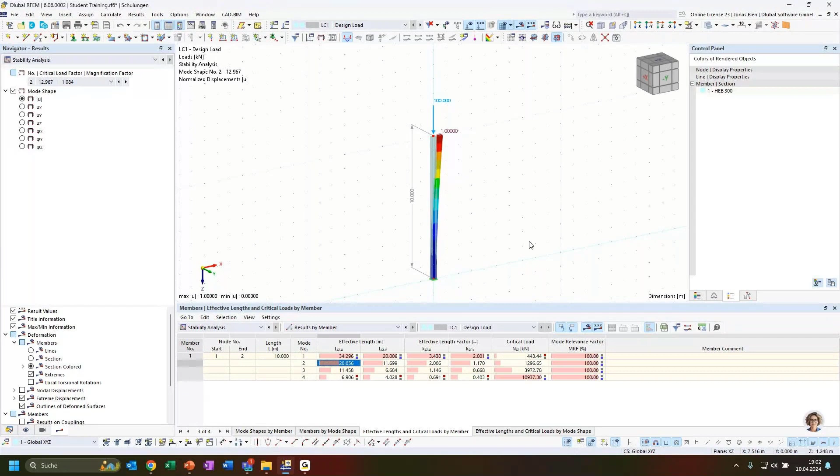So you could ask, why is this important? For this particular case, I could look into any good textbook, which would give me the analytical formula I just showed you, and I could easily calculate my stability load, instability load, and effective length factor from these tables. That is, of course, true.

But with our stability add-on, we can also calculate buckling length for systems where it's not so obvious. For example, from this column—and this is the very last example—we could turn this into a simple moment resisting frame. I'll just duplicate the columns and add a girder to connect these two columns.

We apply 100 kilonewtons to each of the columns, and now we can do the same analysis as before with just one column. We could even leave the length at 10 meters—it's not exactly what the example asks, but we should still get a solution, and for comparison reasons it's probably nicer to keep it as it is.

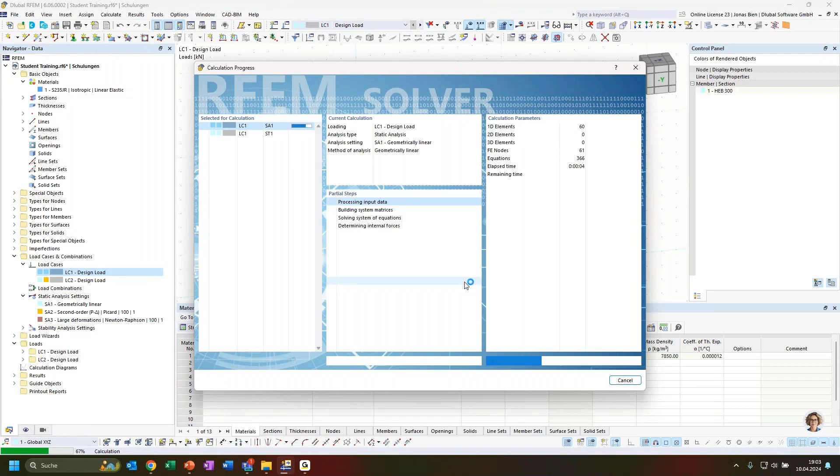So again we calculate our static analysis results, and what we get here as critical load factors is quite interesting. We see the first critical load factor didn't change at all, because for buckling around the weak axis, it didn't help the system to have a second column connected by a beam. The whole frame would now buckle around its weak axis with the same critical load factor as before.

Let's take a look at the second mode shape. This would be asymmetric buckling, but also out of plane, around the weak axis of each particular column. In this case, the girder also wouldn't do much.

But now, analyzing the third mode shape, that represents in-plane buckling of the frame we just generated. For this kind of buckling, the critical load factor increased from 12 to 38, because we've built a frame, and this girder—the horizontal member on top—actually increases the stability of the system significantly.

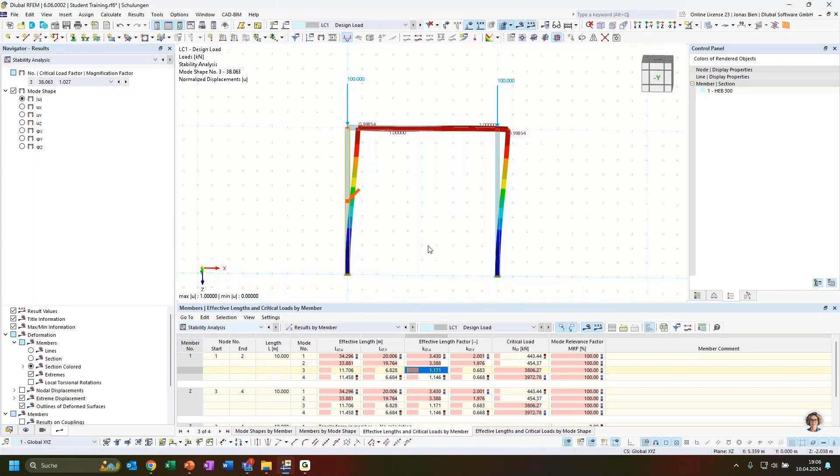We could now, for our mode shape number 3, which represents this in-plane buckling, derive our effective length factor for the equivalent member verification check for this steel column from the Steel Design add-on. In this case it wouldn't be 1 or 2, which we would get for Euler case number 1 or Euler case 2, but some value between.

This specific effective length factor for such a case would depend on the dimensions of the frame, height and the bay length, but also the stiffness of the 2 or 3 members, and also on the loading. The loading could also be different for both columns, and that would also affect the effective length factor for the columns. For such problems, we could use the structural stability add-on to analyze not only the linear bifurcation loads or critical load factors, but also these effective lengths that we can use for the design of the columns.

So what we talked about last is this last example that I just briefly showed in the PowerPoint. We did that a bit quicker on a simpler model, without such large changes - we minimized the amount of changes needed to the model just to create such a frame and to show you what the purpose of our calculation actually is.